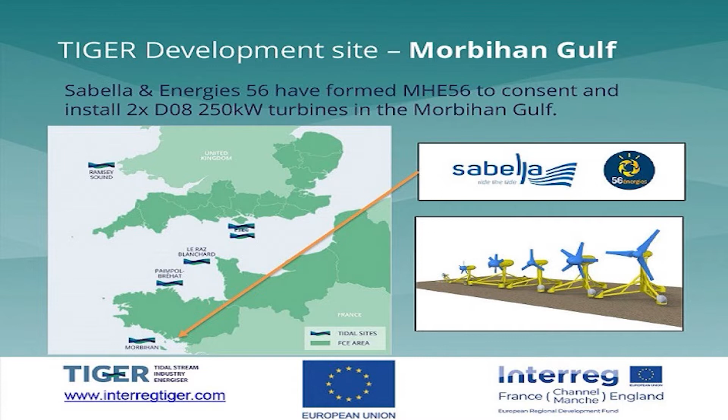So the objective here is to test the tidal energies in these different sites with a view to achieving commercially available technology in a few years on a global scale.

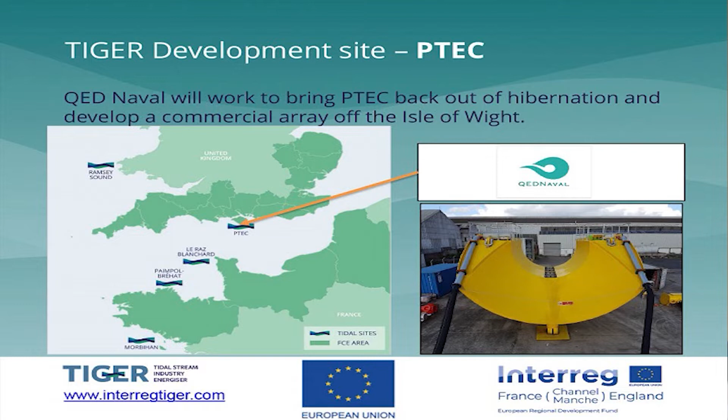And finally, we've got the UK sites there, the Ramsey Sound site in Wales, and of course the PTEC site in the Isle of Wight as well.

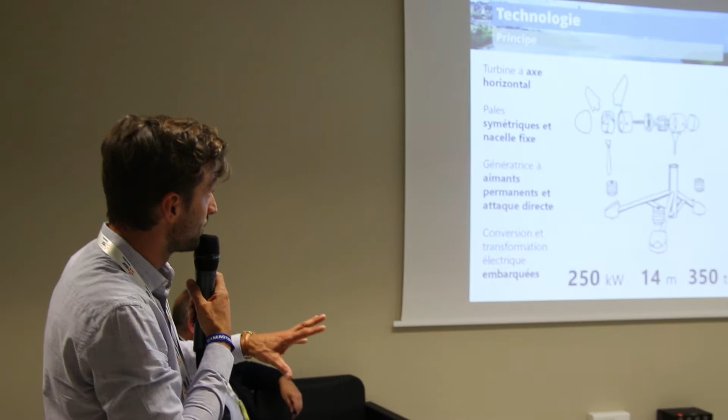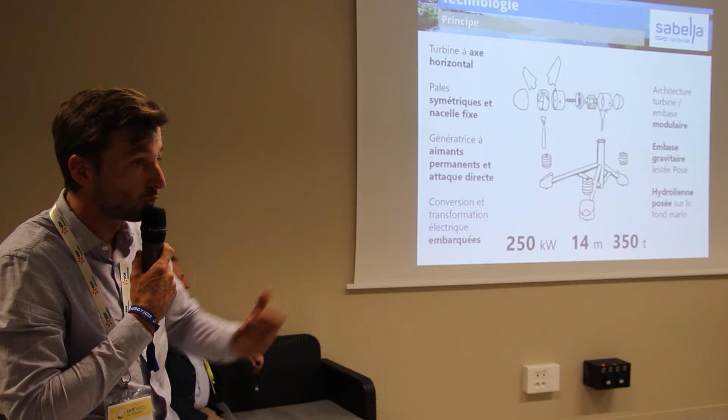MHE has been constituted with Morbihan Energies and Sabella. It's a joint venture. So the machines will look a little bit like the one you see on the slide in front of you, with a fixed nacelle, a maximum of economic value.

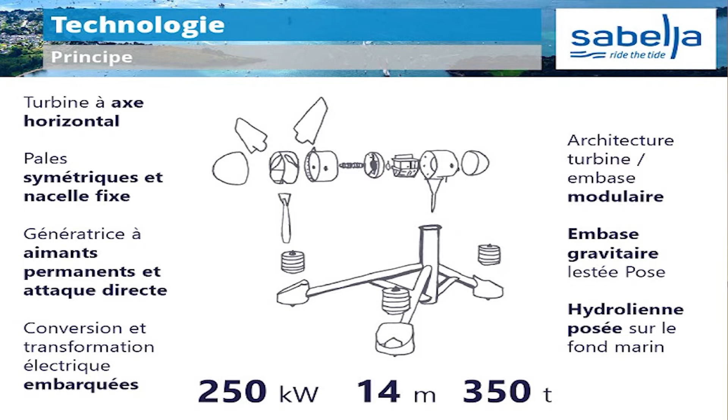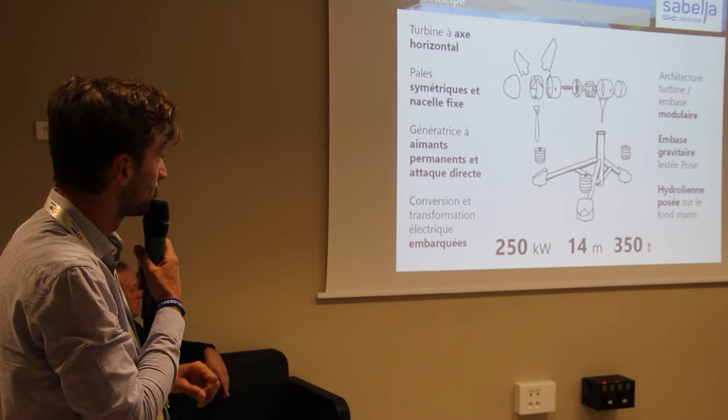So the conversion and the electricity transformers are on board the machine. There's a modular base to the turbine, gravity base to the turbine. No need to actually drill any holes in the seabed. It sits there under its own weight. So the 2 turbines that we'll install at this site will be each 250 kilowatts, 14 meters high.

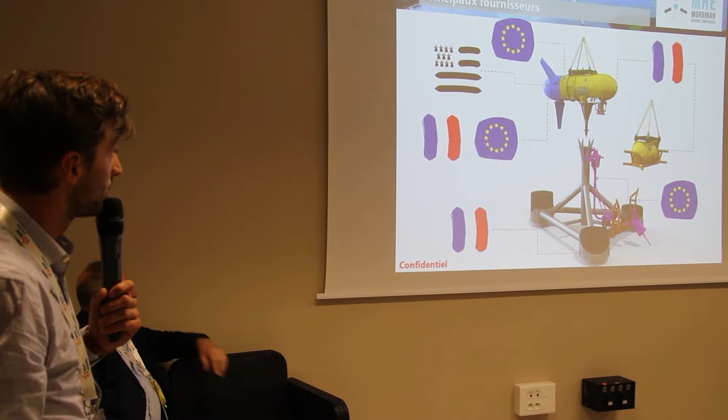So in relation to our main suppliers, we are in a situation of co-design and co-construction with a number of suppliers who we work with regularly, in relation particularly to the principal components of the turbine. These components are heavy, they're constructed as close to the site as we can.

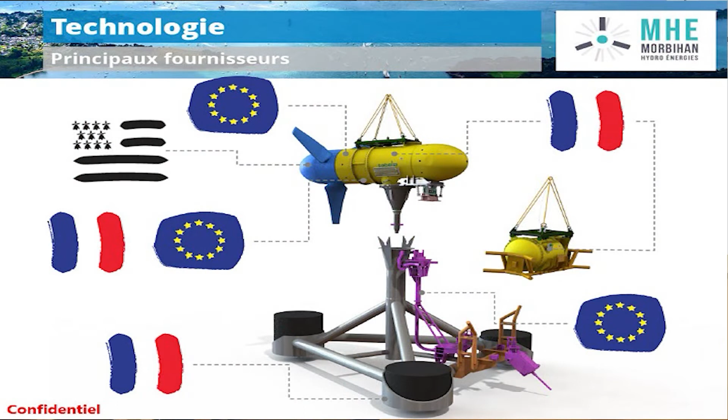All the composite elements of the turbine are constructed in Finistère or even in Morbihan, including the blades, for example. We work with a number of French suppliers, of course. So elements, components like the generators and so on.

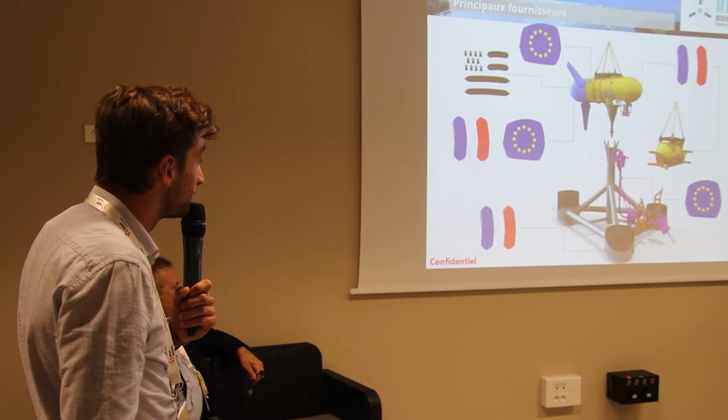So we're very keen to work with suppliers, particularly the very experienced in similar sectors. Of course, our machines are very different from those which they may have worked on before, but equally their past experience in those sectors is helpful. So a number of these components are constructed in France. Anglo-Saxon. So the wetmates are produced by a British partner.

I haven't had the opportunity today to actually go into each of the technical components of this machine, but if you have any questions, please come back to me.

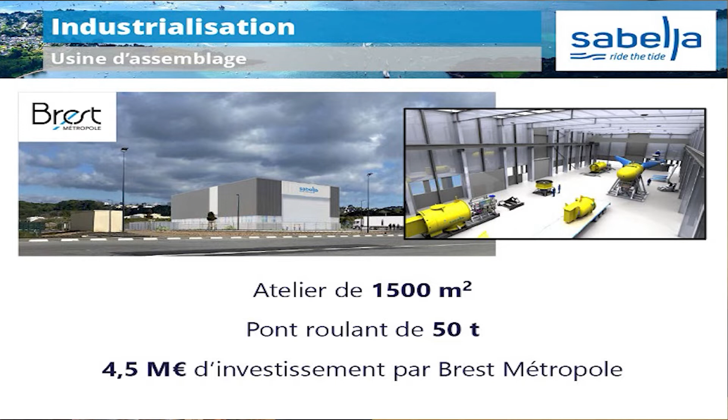So the machines can actually be put inside the new facilities.

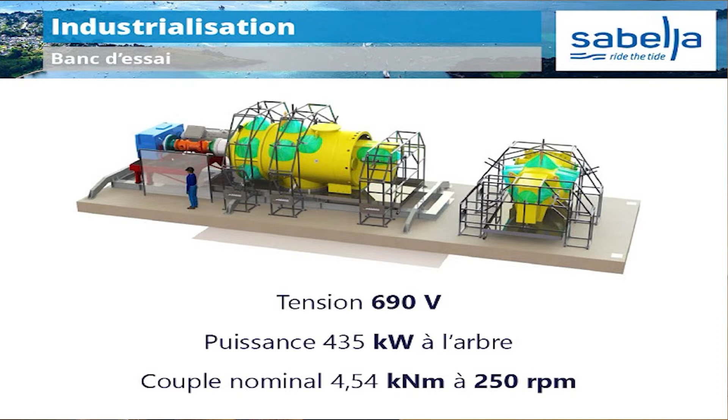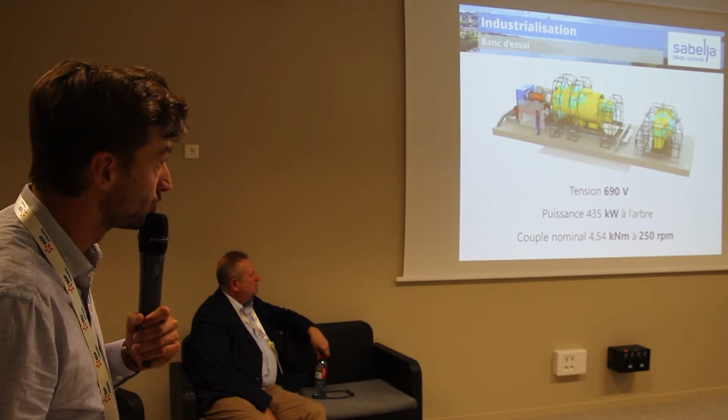So we're looking to put in place a facility so that we can test the turbine thoroughly before it's put into the water. The test bench you see in front of you can actually simulate the conditions that we will expect in the Morbihan.

So back to the issues of today, the opportunities. So a number of the procurements in relation to the machines themselves have already been completed. But we have a number of real opportunities, particularly around things like the supply of cables.

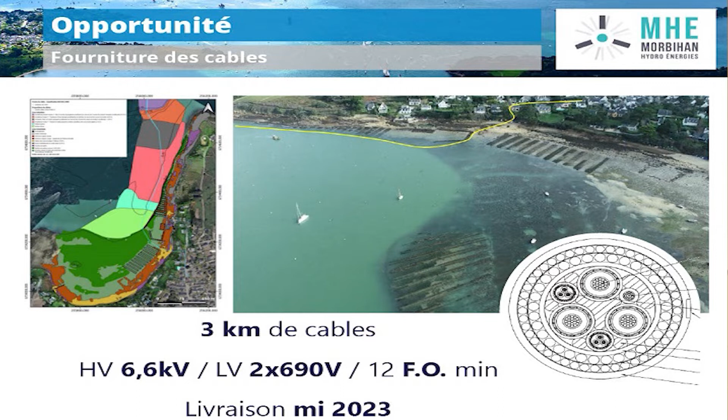We'll be looking to purchase 2 times 1.5 kilometers of cable to connect the machines to the land. We will be launching a call for proposals, call for tender in the coming months for this. So some of the supply chain opportunities also concern the waterborne support for the turbine deployment.

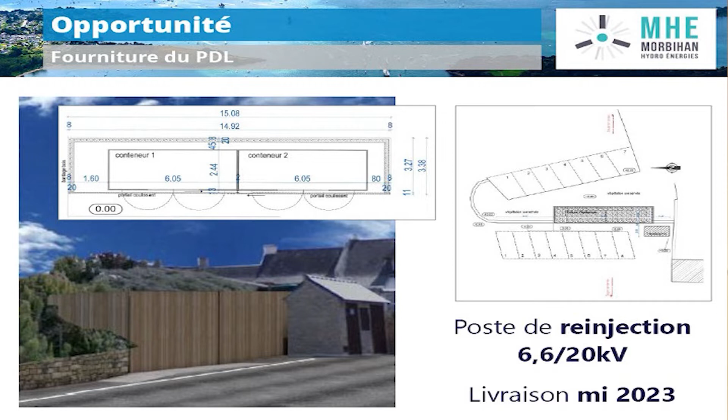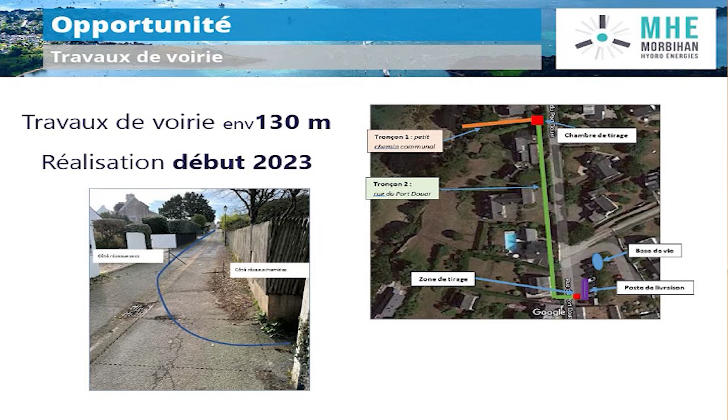So onshore we have a number of requirements as well. We need to construct the services for being able to receive the energy from the turbines and a substation for connecting it to the grid, local grid. There's also 130 meters of road and infrastructure works to be completed, for the cables to be put below the street level and repairs to the surfaces.

Next slide, please. So a little bit about the project. Normandie Hydroliennes will develop one of the first multi-turbine arrays in the Raz Blanchard. 4 turbines. The architecture, as you can see on the slide there, is 4 turbines connected to a subsea hub. We're 7 kilometres offshore. The major site that we have in Scotland, we're only 2 kilometres offshore, and that currently runs 4 turbines back to the beach with 4 individual cables.

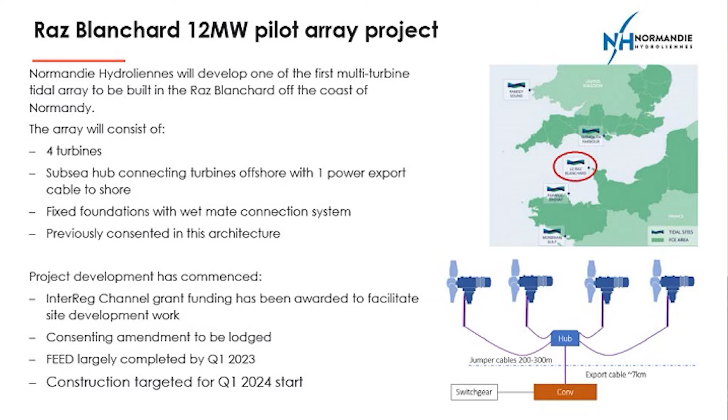So one of the great ways of reducing the cost overall is to reduce the amount of cabling. It reduces construction costs, it reduces capital investment. And to do that, we need a subsea hub, and that is largely, in nice simple terms, a junction box subsea that allows those 4 turbines to be connected up with wet mate systems that are about 200 to 300 metres apart from the subsea hub, worst case, and back to the beach with 1 cable.

We've already installed a hub in Scotland as a trial to make sure it was installable, to make sure it's connectable, and that's all worked well. Our turbine there is currently kicking out 400 odd megawatt hours a month through that hub. So very happy with that so far.

We're going from gravity-based foundations, which is what we use now, similar to Sabella at the MeyGen site. In Normandy, we're going to go to monopile foundations, so we'll pin piles to the ground. Gravity-based we've used extensively since 2010, installing turbines since 2010 in the North Sea, and the gravity-based foundations I think are the right choice when you're at smaller volumes. Once you get to higher volume, they're quite material cost intensive, so there are options there to get that cost down.

And the architecture you see on the board there was already consented in this area. So there's an existing consent that we've taken over and getting varied to take these larger turbines. These turbines were originally consented at 1.4 megawatts. We are now getting the consent variation for 3 megawatt turbines. So a little bit like wind, one of the key indicators in getting costs down is getting rotor size and rating up, just the way wind is.

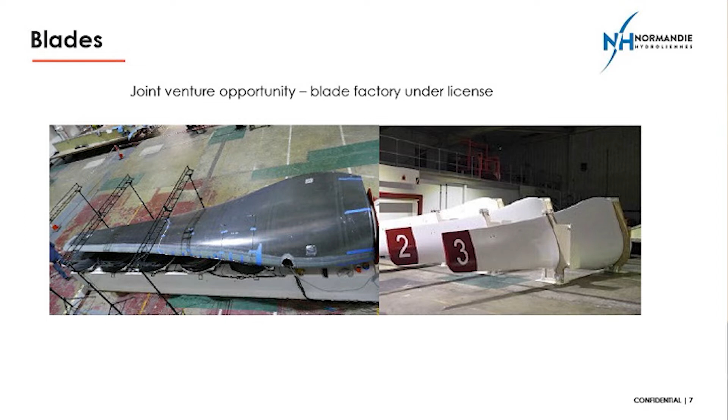The blades are currently carbon fibre. We've used fiberglass without carbon fibre, and we're now using carbon fibre. I think we're actually quite happy with our fiberglass blades, it's just pretty safe at the moment, and no one wants broken blades. We see some cost savings coming in the future of blades. We would like to see that set up as a facility in the same region as we're doing the turbine assembly. It's labour intensive and great for local employment. That's part of our plans, potentially to get volume under a joint venture with the local fiberglass business.

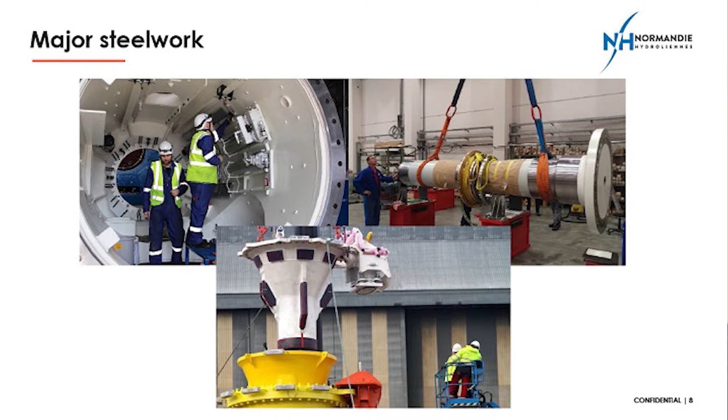Major steelwork: we've got the nacelle, with the gentleman inside it there, that's about 20 tonne. We've got the main shaft, that's another 16 tonne. You've got the stab, which connects the turbine to the foundation, and it just sits there under gravity, under its own weight. These are all big, meaty bits of kit, around 11 to 20 tonne each, and definitely, preferably, should be done as close as possible to the site.

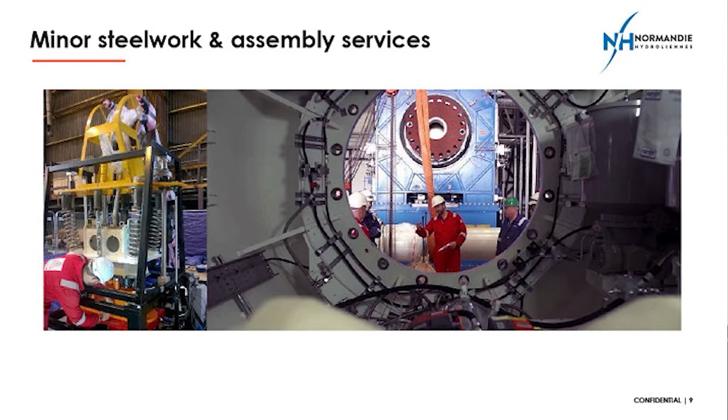Lots of minor assembly and minor works can fundamentally be done locally, and we're already talking to some people for that. The nice thing with our turbines is there's nothing particularly clever in the assembly. It's what I like to sometimes refer to as the IKEA of the tidal turbine. It's not that hard, you get an Allen key, you put it together. We can assemble a turbine in about 3 weeks, and certainly when you get to volume, that will improve.

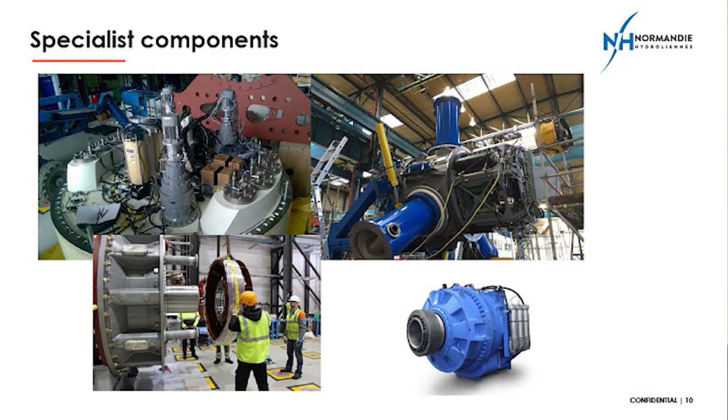Specialist components, each of those are in the order of 30 tonne. That's your gearbox generator, combined - we've got a hybrid there, so it's a bearingless generator. And you've got the pitch and yaw system. We've built turbines without pitch and yaw - the one in Japan at the moment is just fixed pitch. It's again a bespoke application depending on what you're trying to achieve. Certainly in the Raz Blanchard, the pitch and yaw matter given the strength of the currents.

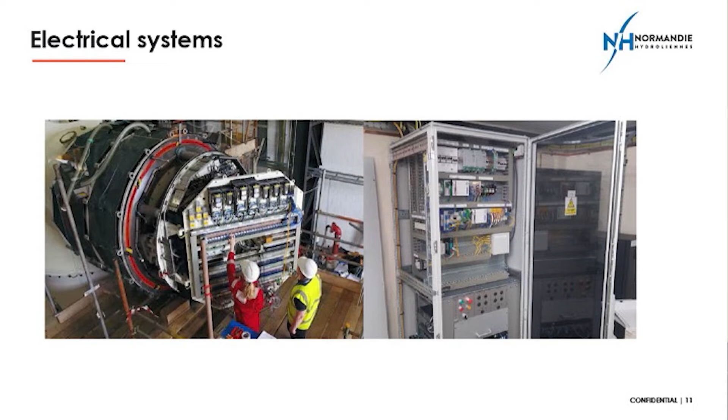We have electrical, which is fairly standard. The one thing I'll say about electrical is quality is of the utmost importance. The supply chain needs to understand that these turbines go underwater and are supposed to stay there for 5 years. You'll never get an electrical contractor to take the liability if the turbine breaks down and has to be recovered. So having an absolutely bulletproof quality system around the small parts of the turbine is key - that's where most of the problems happen, not around the big parts these days. That's key to part of our forward-looking industrialisation of volume.

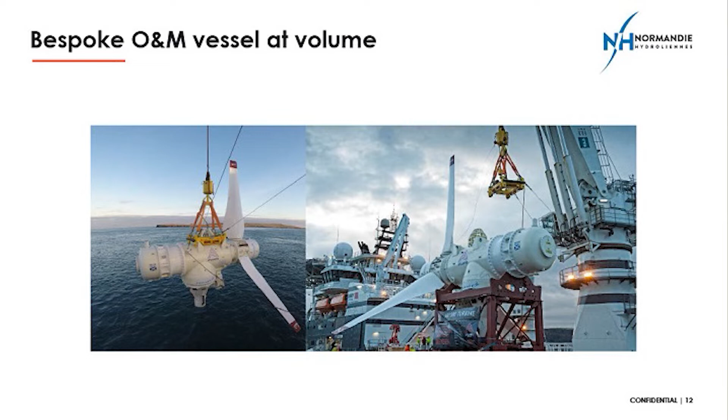The last couple of slides - offshore construction is still a major part of this. People with floating turbines often say this is the Achilles heel of subsea turbines. I disagree, we've been doing this a lot. When you get to volume, you should be able to install or recover a turbine for less than 50,000 - that's not a lot of money in the scheme of things. It's currently costing more like 200,000 to 300,000 for a quick recovery. We've been doing this since 2010. The vessel market we use is the same as everyone uses in this room, the offshore DP vessel spot market. It's expensive again now, just as it was in 2010, and we've been through the good times when it was cheap. Following the Raz Blanchard pilot, we expect to build our own vessel - that's an important part of our volume plans.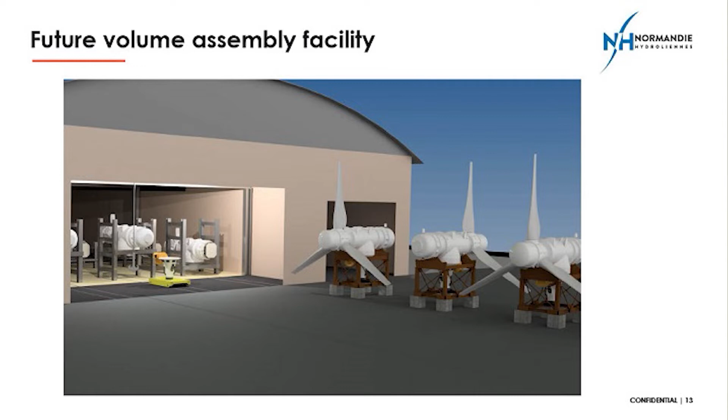And the final slide, which is a little bit similar to Thomas's - we've put a lot of time and effort already into choosing sites in Cherbourg, looking at how you get volume manufacturing. We've got a concept design for a 100 turbine per year facility, which is one of the pictures shown. Thank you very much.

So we're talking about the Raz Blanchard site and the opportunities that the HydroQuest pilot project has given to our development of the next generation turbine.

We've managed to increase the performance of the turbine element or component by 50% in terms of yield. It's lighter, it's more powerful, it's easier to manufacture, and we've lowered the cost.

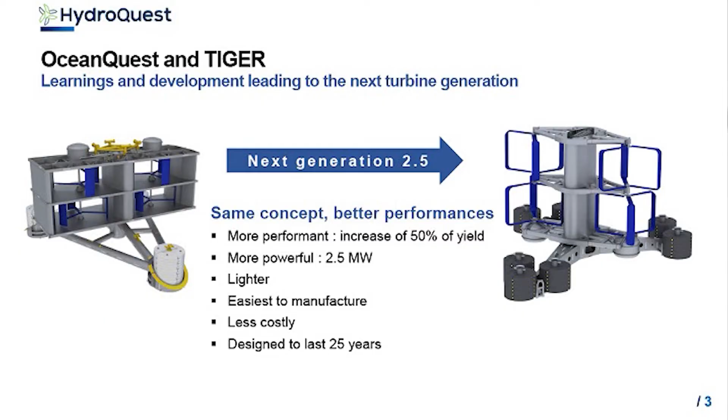So the project's called Flowatt at the Raz Blanchard pilot farm. Construction will start in 2024, installation will take place during 2025, with a view to operation starting in 2026.

At this particular stage, this is an intermediary step we're at before we start launching a series of larger scale calls for tenders.

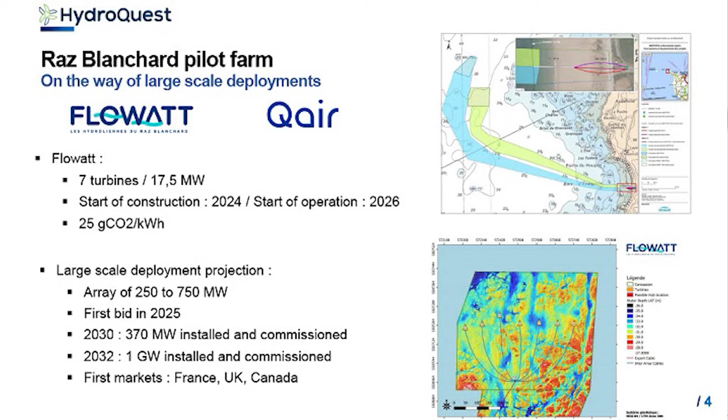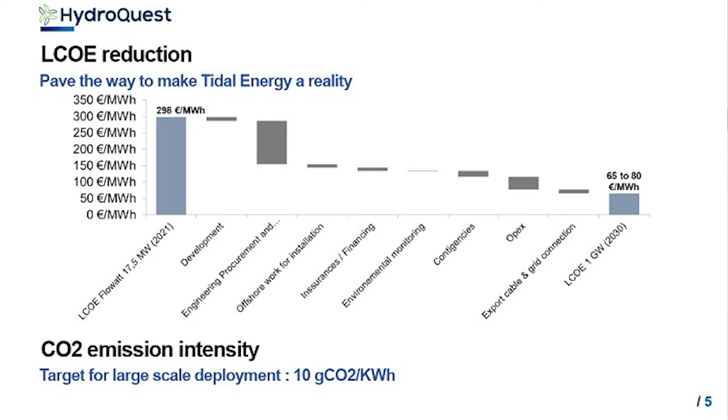The three big gains will come from the scale effect, from increasing the size of the turbines, which reduces costs. We're hoping to increase the size of the machines to create an economy of scale and reduce the cost of energy produced, with the objective of having 1 gigawatt of production by 2032.

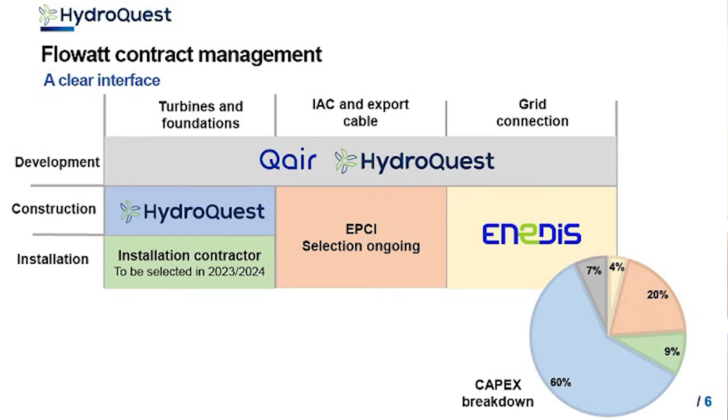On the export connection part, we're working to put together a complete EPC contractor, and we're working with EPC contractors on this subject - the choice is ongoing. So we're currently looking at a selection of a supplier and also an installation contractor at this particular point.

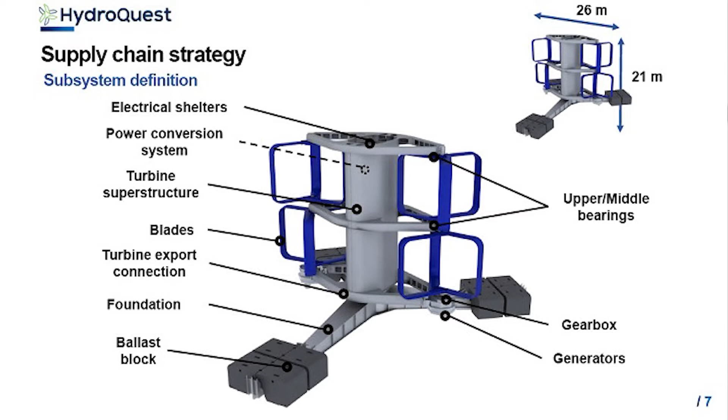Generator on the foundation. Currently, we've made a strategic supplier choice on the key parts of the turbine. So the key parts of the turbine, we have already selected a supplier, which is CMN - a partner that's been with us for a long period of time, helping with the turbine superstructure, the blades, and of course the assembly.

For all the other parts - the generator part, gearbox, bearing housing, and so on - we have calls for tender either ongoing or upcoming. So there's some calls for tender that are to be published or are ongoing in relation to the elements you see in the middle: generators, gearbox, bearings, turbine export connection, electrical shelters.

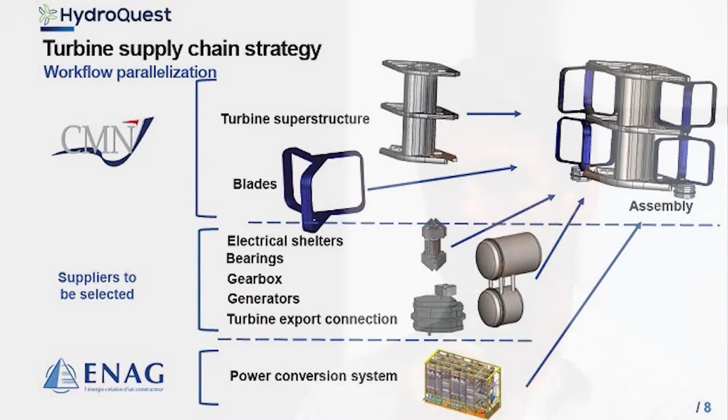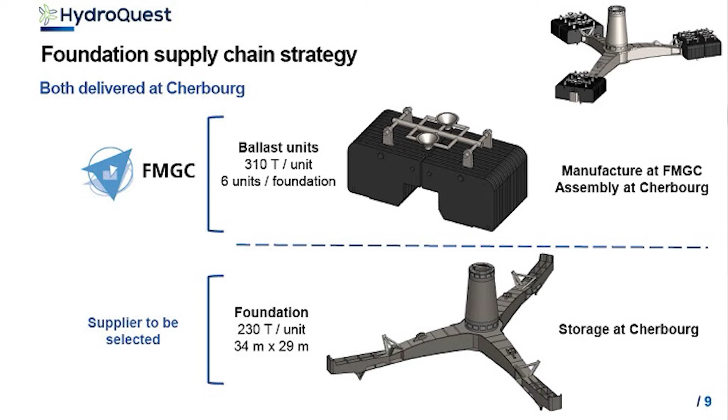On the foundation part, for the ballast side, it's the same - we have a partnership with the company FMGC. And for the foundation structure part, so the ballast units, we have FMGC, but with regards to the foundation itself, we're looking for a supplier, expecting the foundation to be in the region of 230 tons.

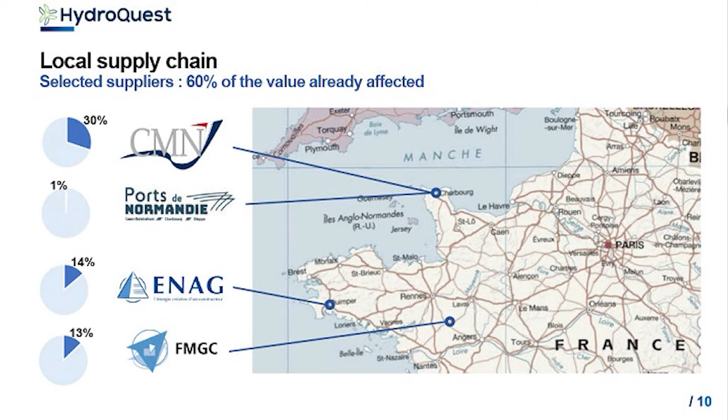So to show you where we are in relation to the turbine construction, here on the map, with the associated added value volumes - 60% of the value has already been allocated, already chosen. So 60% of the overall value has already been allocated to the following suppliers.

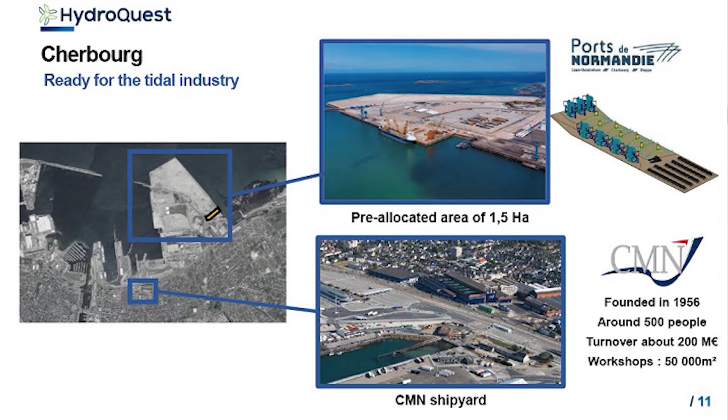With a plan to integrate our 7 turbines, foundations and ballasts within these 1.5 hectares, ready to be sent out to sea. So the purpose of the site is to get things ready, so they're ready to send out to the site for installation.

Raz Blanchard is really the ideal location for these turbines. Transit times are very low, we're very close. So we're quite close to the concession area from the port.

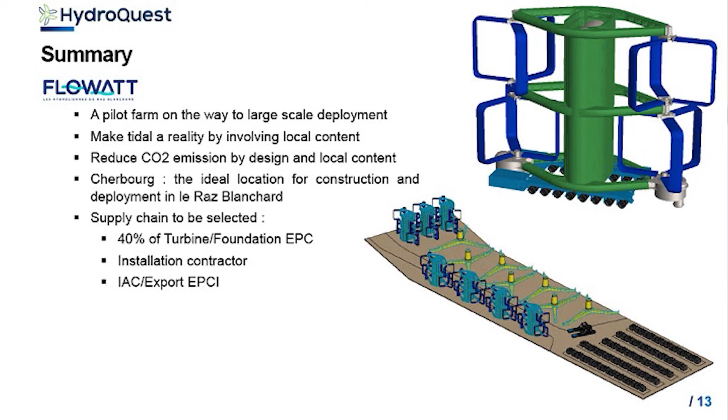To deploy the turbines out of Raz Blanchard. And on the supply chain, what remains to be done, what's still open, is 40% of the value on the turbine foundation part. There's about 40% of the supply chain to be selected for turbine foundation, etc.

Thank you very much.

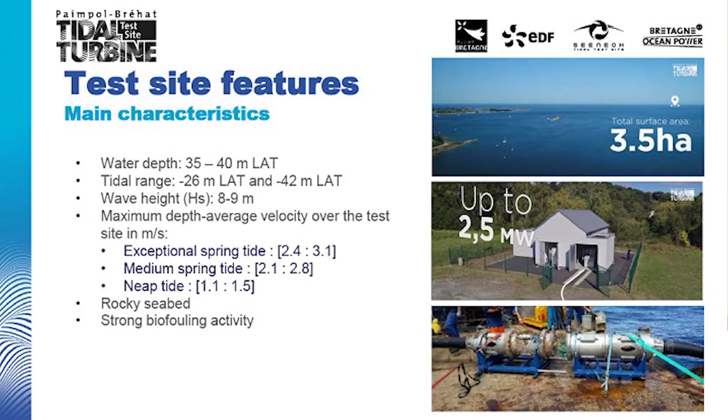So it provides the conditions for good test facilities for new turbines.

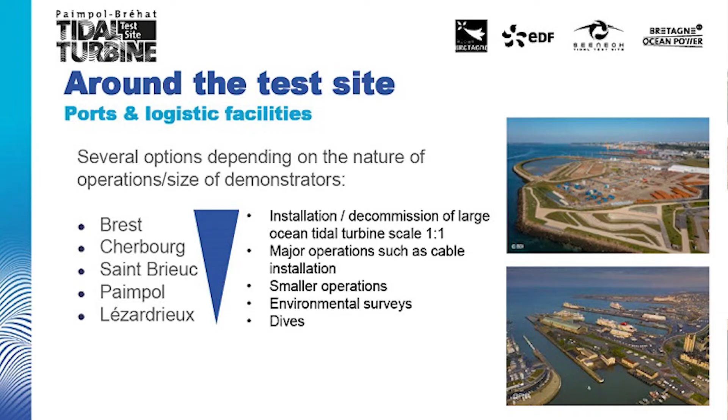So what are the types of activities that we are subcontracting?

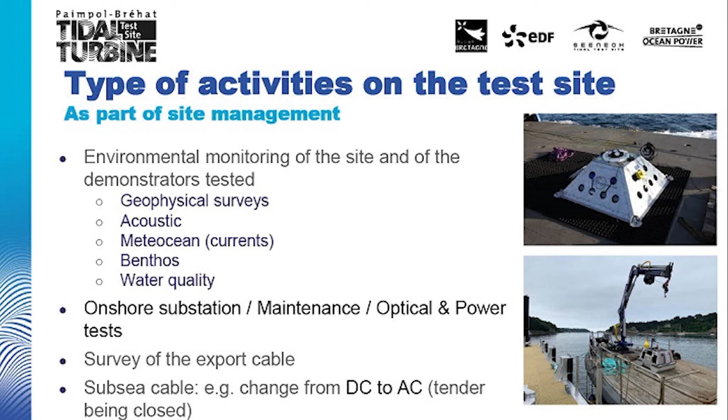We have specific needs around vessels and divers. So lighter multi-purpose vessels, for example. We're always in the market for vessels able to do smaller operations. Vessels which can be between 12 to 25 meters, lifting capacity from half a ton to 1 ton.

Vessels that can support diving, diving activities around the turbine facilities. Important for vessel owners in the supply chain to understand that we will require certificates, registration, navigation permits, insurance, diplomas, etc. Demonstrate a certain level of competence. We do the same for divers as well.